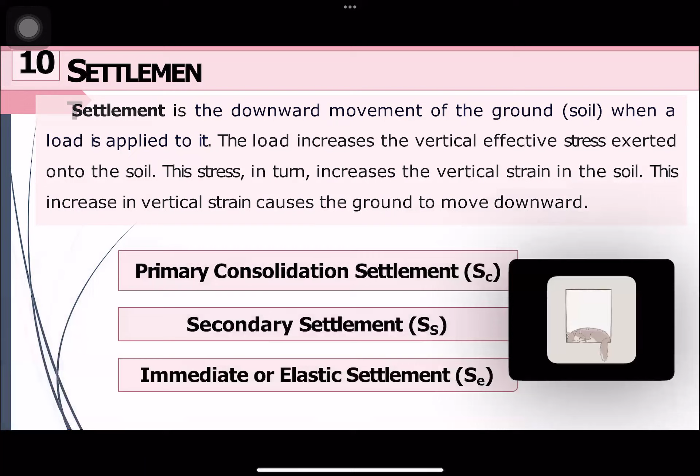All right. So according to the definition, settlement is a downward movement of the ground, which is the soil, when a load is applied to it. So the load increases the vertical effective stress exerted onto the soil. This stress in return increases the vertical strain in the soil. So this increase in vertical strain causes the ground to move downward.

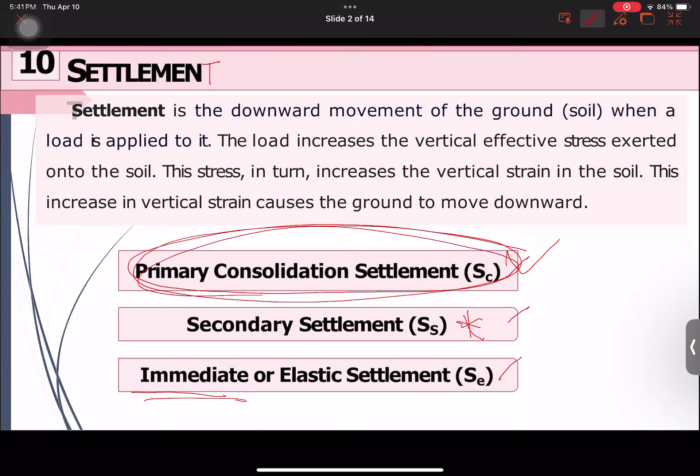Okay? Now, let us talk about the parameters or yung mga gagamitin nating formula kapag primary consolidation settlement yung ating pag-uusapan. Ayan, madami. Daming formula. So, first, kapag ang tinanong is get the total value of your settlement or your ST, ang gagawin lang natin dito is to add all the values ng settlement na meron tayo.

You have your SC, your SS, and your SE. Your primary, your secondary, and your immediate settlement. So let us start with your primary consolidation settlement. As you can see, we have two cases here. The first one is normally consolidated clays, and it is when your PO is equal to PC.

And number two, your overly consolidated clays, that is when your PO is less than your PC. And under your overly consolidated clay, as you can see, meron tayong two cases. You have your A and you have your B.

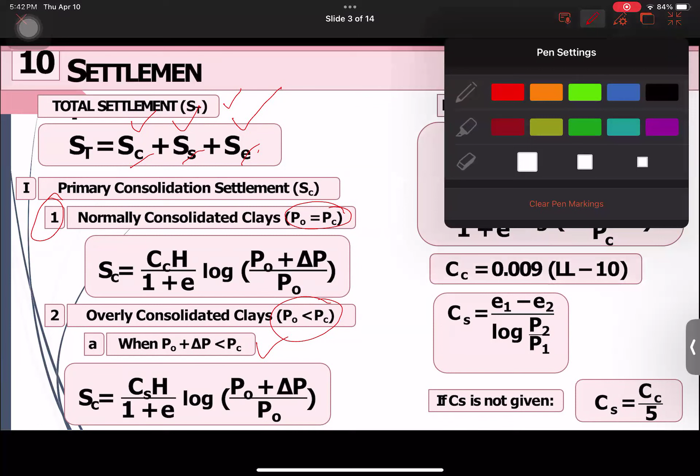Alright, before we proceed dito sa formulas na to, let us talk about the difference between the normally consolidated clay and the overly consolidated clay. So, ano ba yan? First, let us try to define your normally consolidated clays. Can you take note of this?

So, pag sinabi nating normally consolidated clays, yung type of soil na sinosolve natin or ina-analyze natin has never been pressed harder than it is now. Ibig sabihin, hindi pa ito masyadong na-compress dati sa ngayon. Alright?

Never pa siyang naka-feel, or never pa siyang na-compress more than ngayon. So, for example, kapag nilagyan natin ng mabigat or heavy structure yung soil natin or any mabigat na object, it will squeeze down a lot. Mas magsisettle siya kasi never been compressed or never been pressed pa nga siya before.

So isipin niyo na lang yung mga sponge natin kapag naghuhugas tayo ng plato. Kapag skinwis ninyo yan ng sobra-sobra, di ba para siyang magde-deflect or magka-crumple? It is because never pa siyang na-press before, not until kinumpress natin siya. So ganun yung idea ng normally consolidated clay.

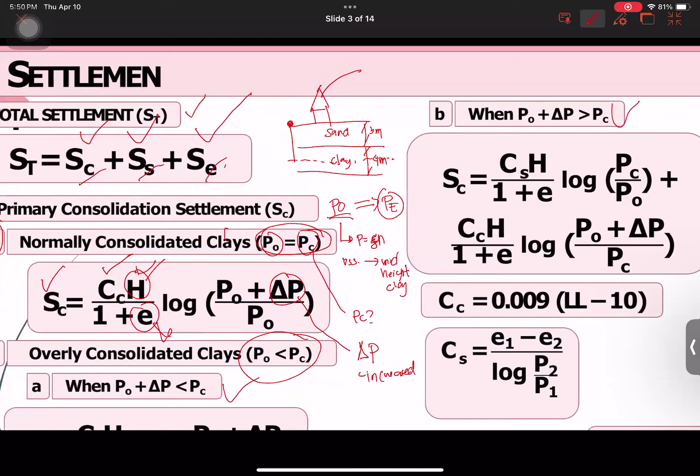So, dito tayo sa overly consolidated clay. So, meron tayo ditong when PO is less than PC. So, you will use this formula: CsH over 1 plus e log of PO plus delta P over PO. Memorize this. Somehow, parehas lang sila ng normally consolidated clay, ito lang yung nagbago. Dati Cc, naging Cs na siya. At ano ba yung Cs? That is your swell index. Ano yung pagkamaga ng soil natin?

Okay, ganun yun. So how about naman when your PO plus delta P is greater than your PC? So, case B na tayo sa ating soil settlement. So, dito parang combined formulas na siya ng normally at ng overly ng case A natin. So, this is CsH over 1 plus e log of PC over PO plus CcH over 1 plus e log of PO plus delta P over PC. Yes, kinakailangan nyo tong i-memorize. Actually, again, madali lang yung topic. Ano yung magiging kalaban nyo dito? Is yung memorization ng formula.

Kasi aanuhin natin yung problem kung hindi nyo naman memorize yung formula. Sayang din. Okay? So you have here a formula for your compression index if it is not given but the liquid limit is given. So that is 0.009 (LL minus 10). So if in case your Cs naman is not given and Cc yung binigay, you can solve for your swell index as Cc over 5.

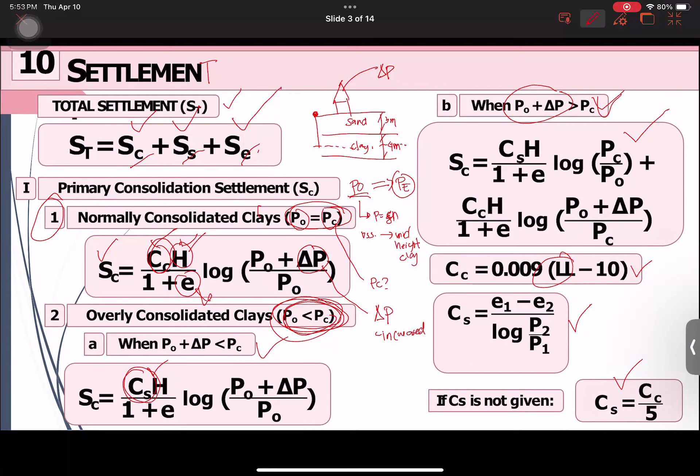Or you can use this formula kapag binigay naman yung dalawang void ratio at yung pressures natin. Primary pa lang ito. So, let us move to your secondary settlement. Dito sa ating secondary settlement, kailan ba nangyayari yung secondary settlement natin? It occurs after your primary consolidation settlement is complete. So that is why dito sa formula natin, we will talk about time. Meron tayong T1, and your T1 is time of completion for your primary settlement. And ang T2 natin is time after completion of your primary settlement.

So you have here your C, kita nyo yung parang infinity. That is your secondary settlement. Medyo mahaba lang din yung formula ng ating secondary settlement, kasi bago natin ma-solve yung settlement, may dadaanan muna tayong dalawang formulas, which is your e sub p. That is your void ratio at the end of the primary consolidation, and you have a formula of e minus delta e. So paano naman natin i-solve si delta e? Meron siyang another formula. Dami nyo ng formula i-memorize. Kaya nyo yan. That is Cc log of (Po plus delta P) over Po. Kilala nyo na si Po, kilala nyo na rin si delta P.

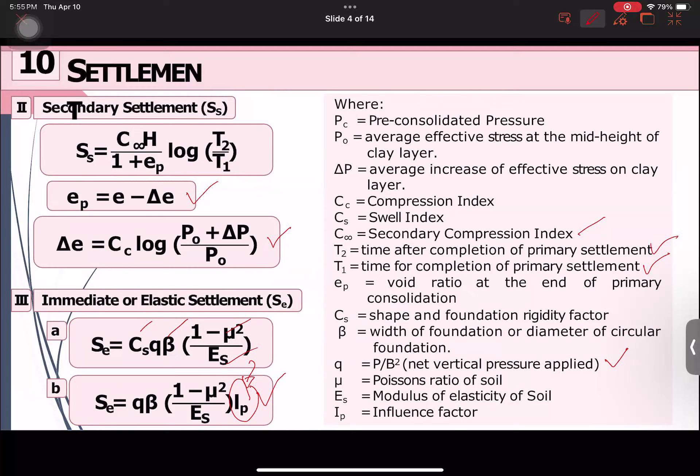Let's try this example number 3. You have here a 2-meter clay layer, values of e equals 0.92, specific gravity 2.72 and liquid limit of 40%. Above the clay is a 3-meter thick layer of sand with e of 0.50 and a specific gravity of 2.62. The water table is located 1.6 meters below the ground. If a 3-meter thick backfill is placed on the ground surface having a unit weight of 17.3 kilonewton per cubic meter, determine the following. First is the compression index of the clay. Next is the effective pressure at the midpoint of the clay. And lastly, the primary settlement of normally consolidated clay.

So ngayon, maswerte lang tayo kasi meron tayong figure na binigay sa problem. But normally, sa mga problems natin sa board exam or sa mga quiz, sa mga assessment, figure is not given. You need to comprehend. Kailangan i-analyze or intindihin yung gustong gawin ni problem. So letter A, ang hinahanap natin is your Cc, or your compression index.

Next is the effective pressure at the midpoint of the clay. Di ba kilala natin yan as Pe? But naging strict si problem. Sabi niya at the midpoint of the clay. Ano ba yung kinukuha natin at the midpoint of the clay? That is your Po or your overburden pressure. And lastly, let us have your primary settlement, which is your Sc. Okay?

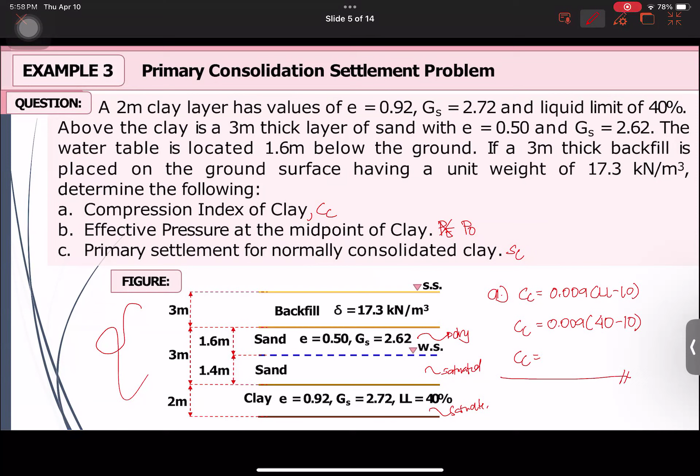Sige. May sagot na ba? Parang naririnig ko na kayo na may sagot kayo. Is that equivalent to 0.270? And I think that is correct. Okay, so letter B is to solve for the effective pressure at the midpoint of the clay.